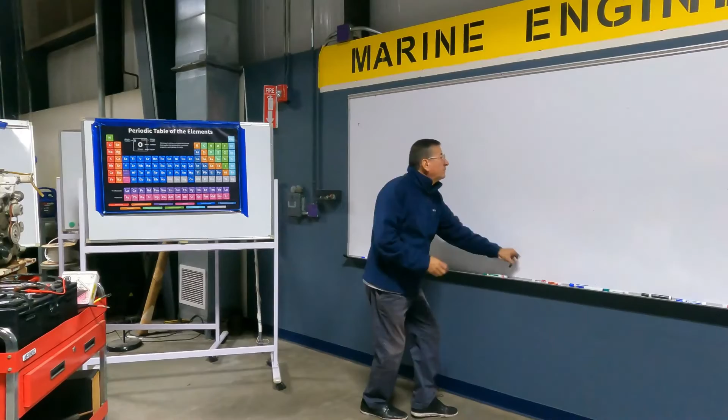Let me check. In my boat, 12 volts, and Dany's boat, 24 volts. Yeah, depends on how it's... No. We are going to do the exercise. Look at this. I have two batteries, guys, follow me. I have two batteries connected in parallel because my boat is 12 volts and 200 amps. And each battery, Javier, is 12 volts, 100 amps. 12 volts, 100 amps. Everybody follow me?

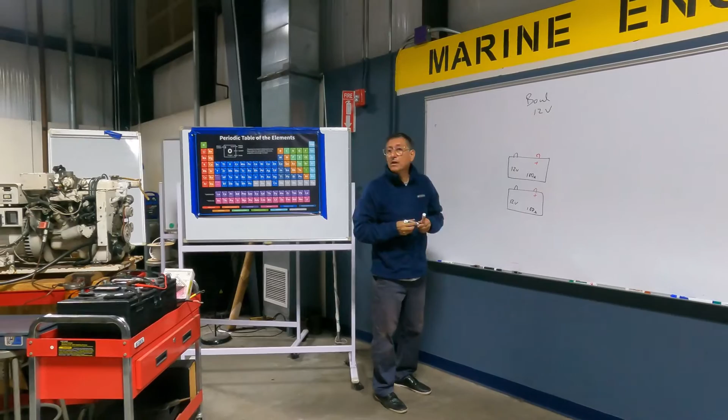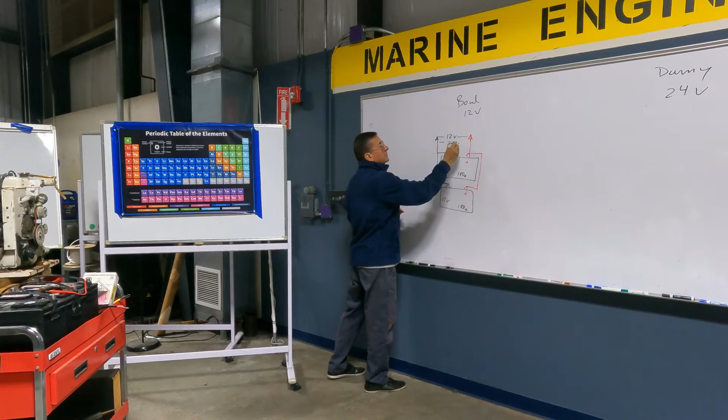I'm going to connect both batteries, and this is my output. And I am going to connect this, and this is my output. How much do I have here? 12 volts and 200 amps. 200 amps. How much is the power? You remember yesterday the two magic formulas? Voltage equals intensity times resistance, and power equals voltage times intensity.

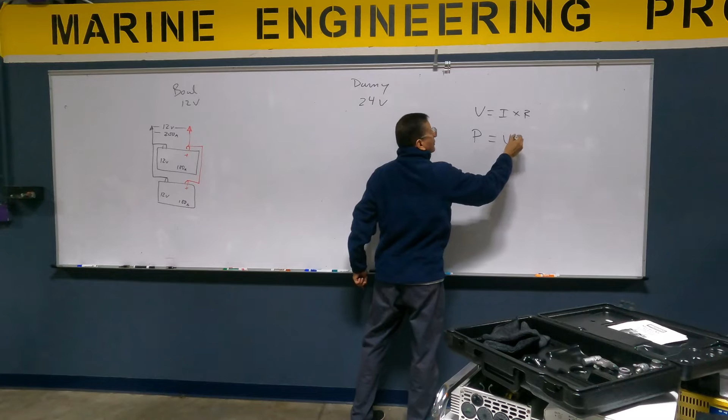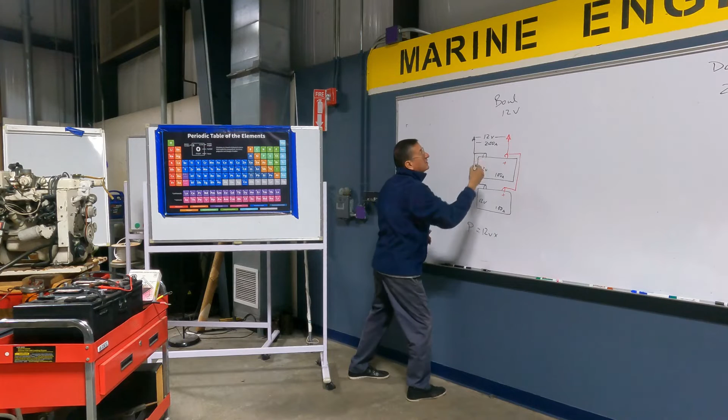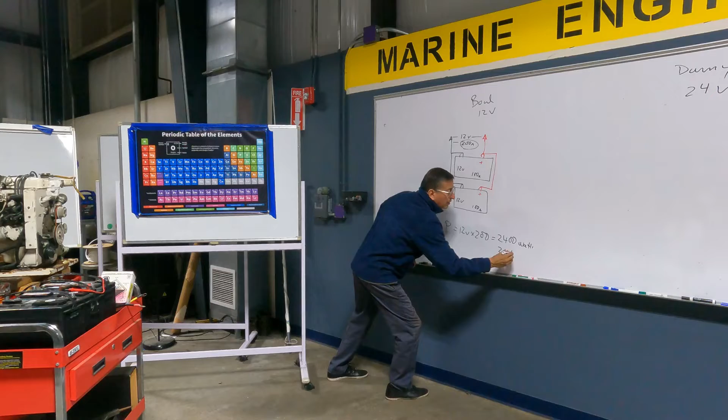Power in watts. How much is the power in this boat? It's 12 volts times the intensity. The intensity is 200 amps. How much is that? 2400 watts, or 2.4 kilowatts. Yes or not? Yeah. Okay, that's the power of the Lopez boat.

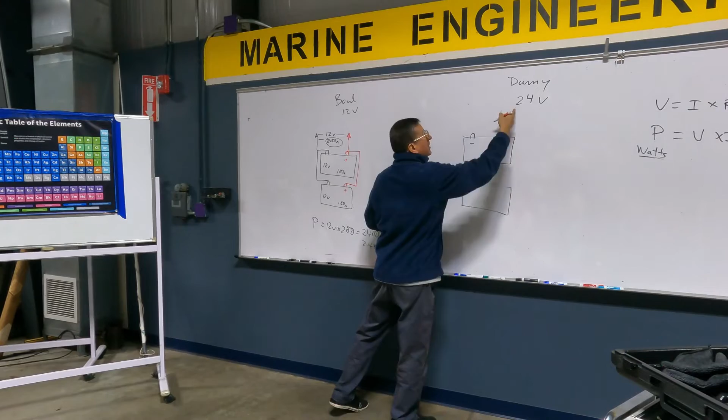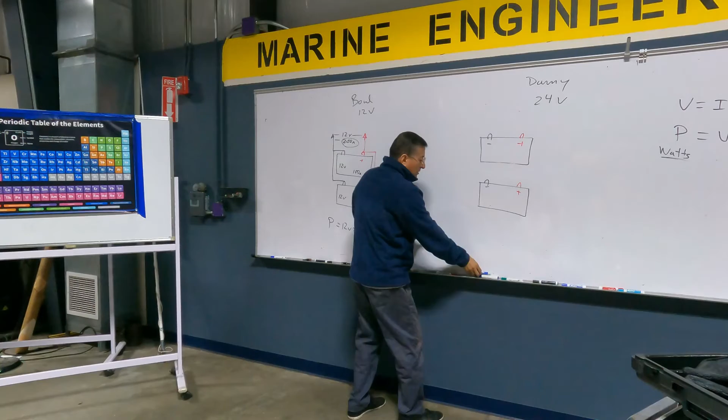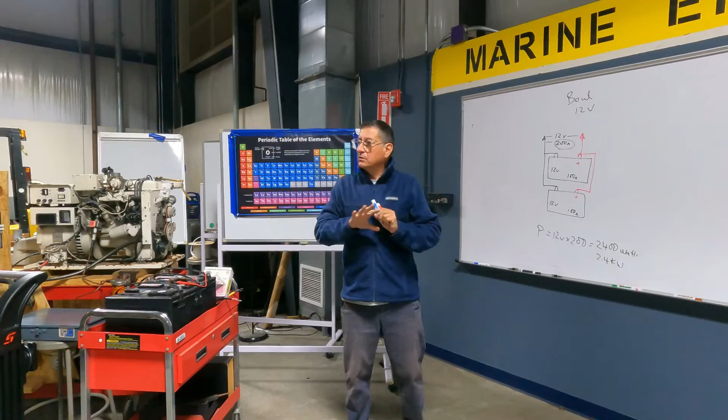Dany's boat is in series because it's 24 volts, no? How is the series? Which cable do I connect? The negative to positive. Which one? No problem, no? I am going to connect this with this. How should that connection be? Tight. Lock nut on. And protected, no? Okay, and what is my output? This is my output, and this is my output.

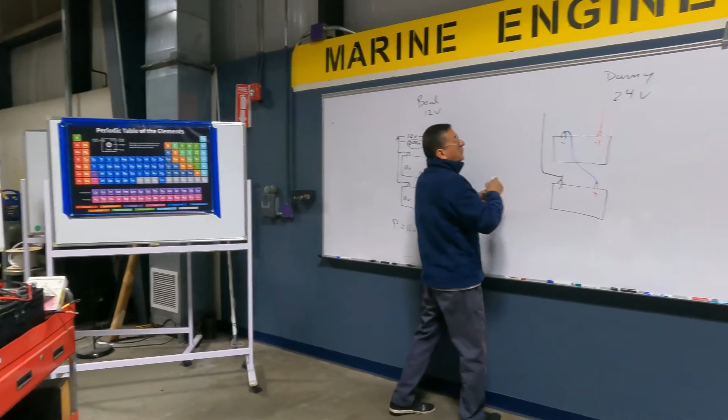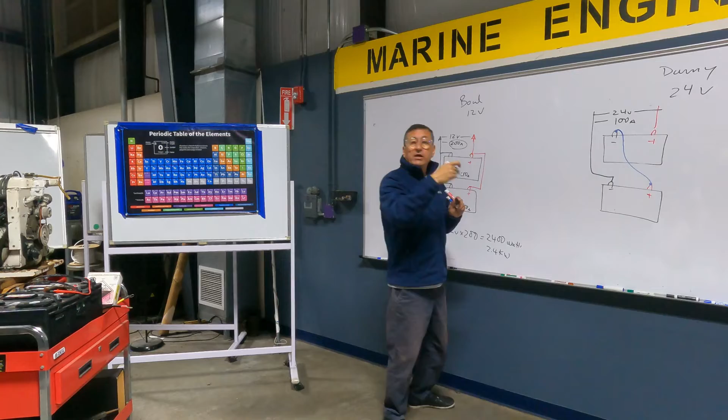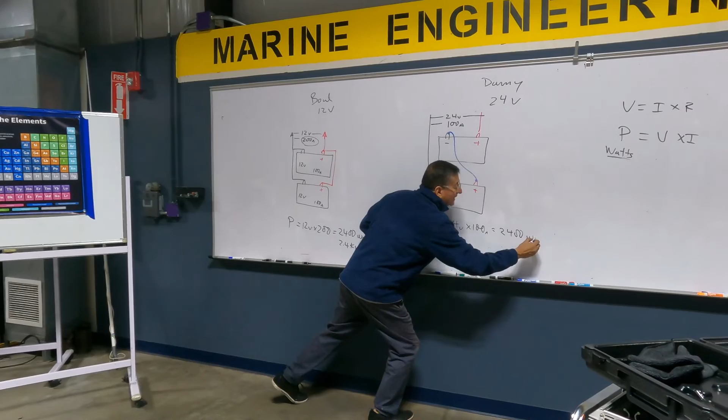How much is the voltage over there in the output right now? 24 volts and 100 amps. Oh, less amps. I'm going to check the power in Dany's boat. How much is the power? 24 times 100. How much is that? 2400 watts. Ah, the power is the same. Dany, your boat is exactly the same as my boat.